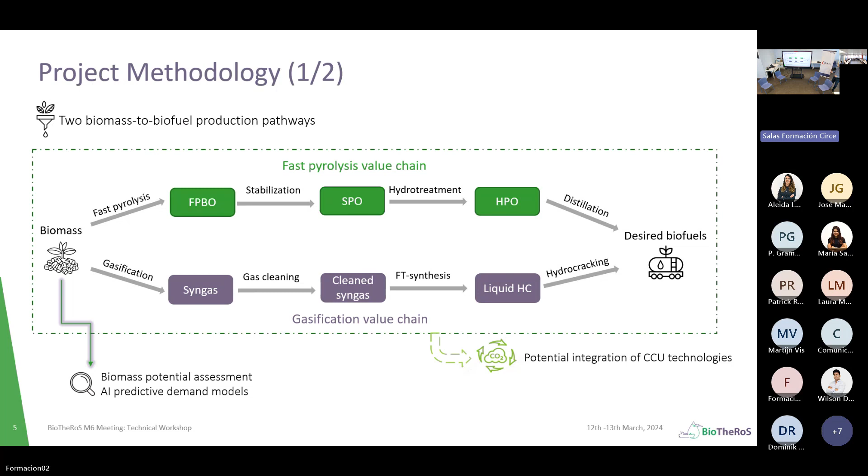The second step is the lab scale, with units at BESS and PTG for gasification and pyrolysis. Then the pilot scale, moving from lab scale to pilot scale at TRL5 in order to validate the technologies, resulting in a number of final products as shown on the right. Stakeholder engagement is also required, and it's something we would like to emphasize during our project.

Here are the expected results. First, environmental: we expect our solutions to reach an 80% greenhouse gas emissions reduction compared to the fossil fuel-based value chain. We also expect savings of energy of about 15 to 25%, while aiming to replace 25% of the current feedstock used for biofuels in aviation, not currently used for advanced biofuel production.

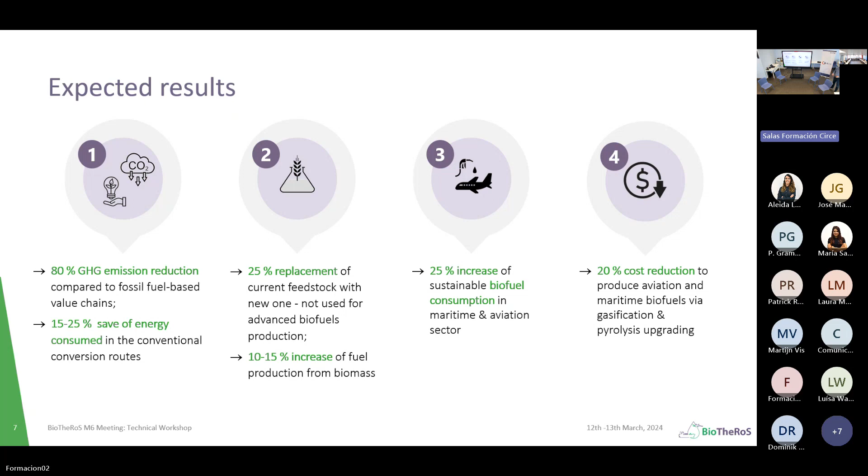As we mentioned, the target of the workshop is to engage with stakeholders, to identify barriers and challenges for our technologies, and to see your interest in the technologies and what real value chains are expected in the future. This will help us build our concepts and make our scenarios realistic. So first, see the barriers, understand the market, and engage the stakeholders in this effort.

Of course, in this effort that we do through the workshops, we also need feedback from other European projects. So we are open to discuss with other European projects and find synergies.

Finally, I have two slides for the groups that we target through this workshop and the next workshops we will organize in the BioTheRoS project.

First of all, biomass providers. Here we need some feedback, and I think during the topic the moderators can discuss more about that.

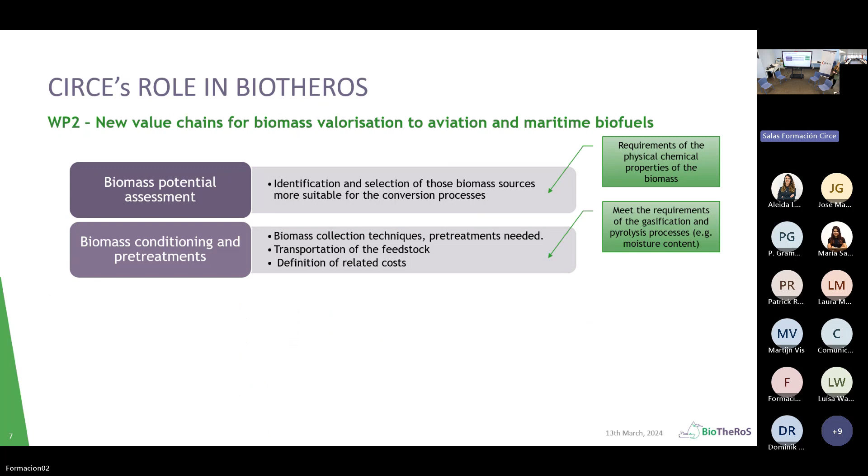That is something that is not trivial, and somehow it is also one of the main outputs of our participation in BioTheRoS. We have two parts of this. One part is already being performed by my colleagues Sebastian and Daniel in terms of understanding the biomass potential and what we need to do to prepare those feedstocks for their further use. That has been done mainly with our previous expertise and know-how in the processes, but with public information, public reports, and previous experiences in other projects.

But this is also key to have your feedback as industrial stakeholders, feedback from the association, and feedback from final consumers, to understand how we could upgrade this information to make it more accurate, so we could have a better prediction of what is going to happen and how the new value chains are going to be shaped.

That is going to be translated into two main confidential outcomes that cannot be fully released at the end of the project, but that would be the whole cost design of the new value chains and the predictive biomass models. For that, it is key to have information from the processes in terms of efficiency, yields, upgrading that we need to do afterwards, and from the policy framework, how these markets are going to be promising in the following years, even though the targets are huge.

So it's not going to be that easy to convert everything into a fully decarbonized maritime and aviation sector. So it is very important to have this type of initiative, because at the end, it is the opportunity to interact with each other and to have the perspective from different sectors that are not included in the project itself.

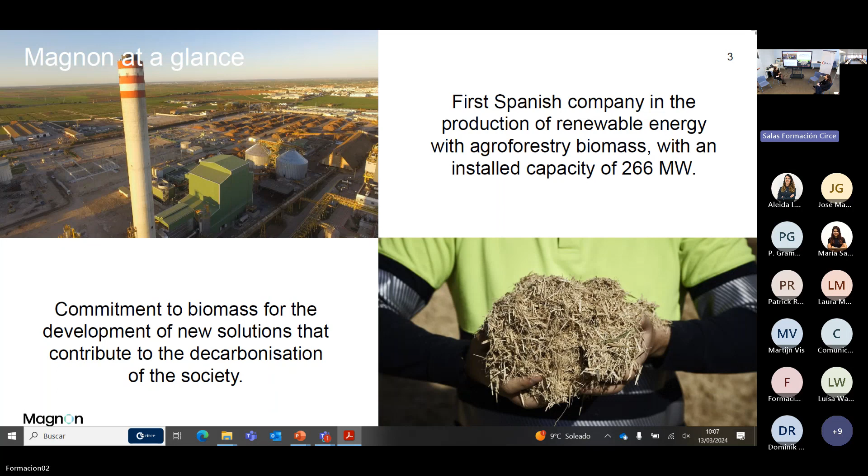Let's think here, I don't want you to put the red cards. I will try to manage my time as fast as possible.

Magnon, in the beginning - I say 'they' because I've only been with Magnon for a year and a half - started in the south of Spain with 8 different electricity production factories using biomass. We use, as you said, between 1.6 and 2 million tons of biomass for our factories. So we can consider ourselves specialists in biomass for our power plants.

But two years ago, we started to think that we had to change our business a little bit, not only for power plants and power production, but also to use this know-how of biomass supply that we have for our power plants to sell to third parties, or to participate in projects using biomass for other uses, not only for energy.

So nowadays, as you can see, in the south of Spain we have the power plants, but we also now have different capacity to supply biomass in the north and east of Spain. What you can see in Galicia, in the northwest of Spain, are the biofactories of ENCE, which also have some power production with biomass. So this is Magnon, and this is Magnon with ENCE.

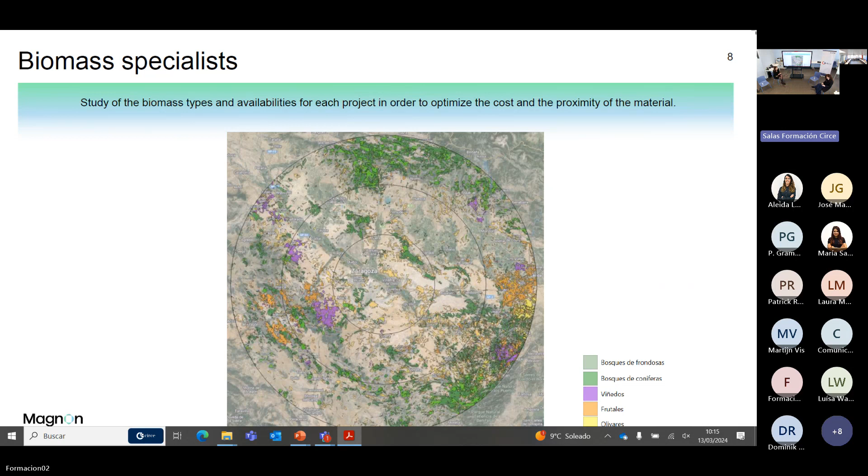So we make this analysis, we establish how to build the supply chain, how many people we need, how much material we need, how we can handle this biomass. We also need depots, warehouses for the biomass, because fruit has a lot of seasonality — we only have the fruit biomass from January to June, so we have to stock it somewhere. We have to design this kind of supply chain for our customers and for ourselves.

And that's just to finish — this is more or less a summary of what I've already said. So as we said, we consider ourselves specialized in biomass. Importantly, we have an internal decalogue for the sustainability of our biomass. All the biomass we use follows this, but mainly we say that we are not going to use biomass that could be used for other, smarter uses.

Okay, so at the end, we only use residues, and the word residues is always quite uncomfortable for us. We use the last use of the biomass for the production of energy. From here, we help in general the rural areas. We finance machinery because there is a lack of machinery here in Spain to obtain the biomass. And we make this kind of analysis, and of course, all the time we're trying to look for new biomass, for new types of biomass in Spain, and we have our team of machines. So this is more or less what I wanted to explain.

If you want to discuss about biomass, it would be great for me, on any of the areas that you have. Okay, thanks. Thank you, Esteban.

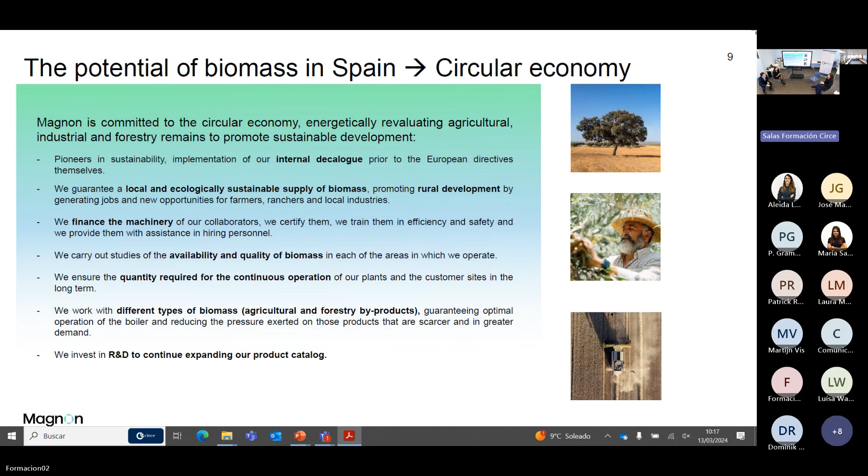Really nice to meet you. I really appreciate that. And it is very interesting because you already mentioned some points that are going to be addressed in questions about the sustainability of the feedstock. Yeah, how you manage to somehow combine this?

So very interesting. I think the next one was Teresa from Environmental - let's say the translation would be. She is an agricultural engineer, specialized in the food industry, and has...

Sorry, I was just following my PPT. Okay, as you wish, I mean, I guess there is no... Oh, no, there is no problem. But you can say it, I mean...

Laura, are you there? Yes. So do you want me to share my screen, or are you going with the other presenter?

Please just give me a second so I can provide a short introduction of herself. Laura holds a PhD in Chemical, Environmental, and Biofood Engineering from the University of Oviedo. She has experience as a researcher at the university, focusing on environmental technologies, but also in the industrial field, specifically in the steel sector. So she could provide us a very wide perspective of what's been done in the different potential biomass consumer sectors. Since the end of 2022, she's been part of the R&D department of Cogersa, where she's now working, and is mainly linked to different types of European projects. So now, Laura, the floor is yours.

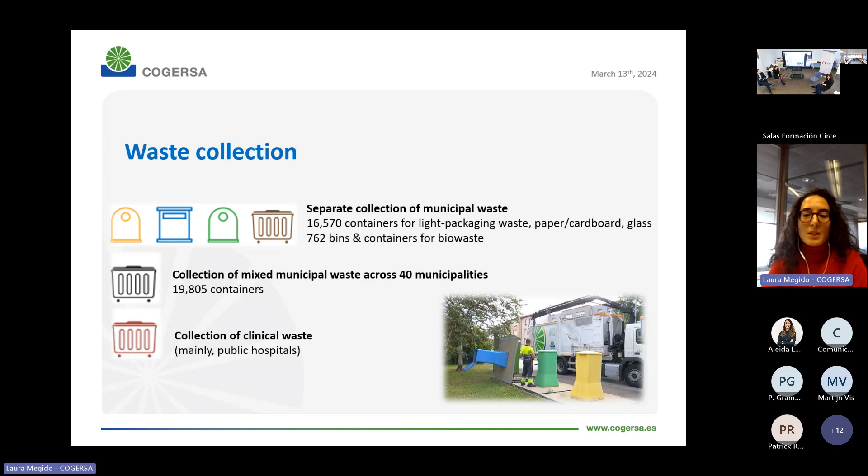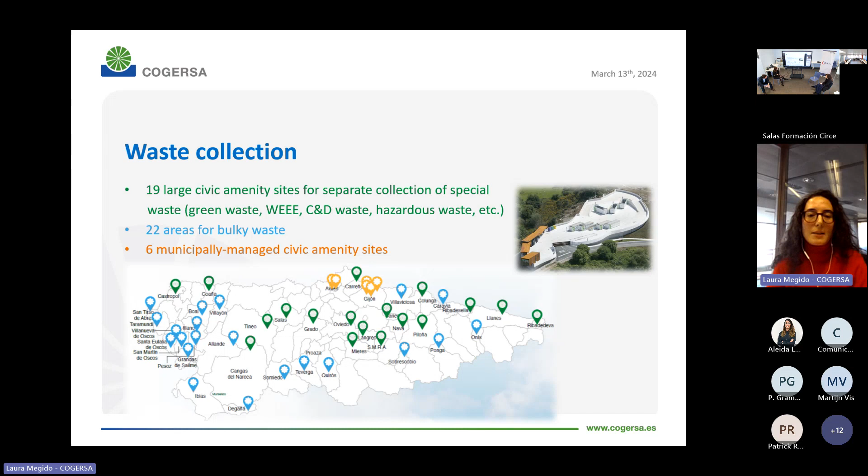Here's some numbers. In 2022, Cogersa managed around 821,000 tons of waste, of which half of it was municipal waste. Other larger fractions were also construction and demolition waste, industrial waste, and sewage sludge. Of these tons of waste managed, around 43% was recovered.

Cogersa sells some products such as recycled aggregates with the CE marking or compost obtained from green waste or from sludge. Also, we produce electricity using biogas engines.

So where is all this collected waste treated, and those materials and energy recovered? Well, that happens at the Waste Treatment Center, which is quite a unique complex that integrates many facilities.

For example, an MBT plant for mixed waste, sorting plants for light packaging waste and paper and cardboard, an anaerobic digestion plant for biowaste treatment, 3 composting areas for treating green waste, sewage sludge, and digestate, etc. There are also complementary processes, such as 2 wastewater treatment plants, a laboratory, and an open lab for R&D projects.

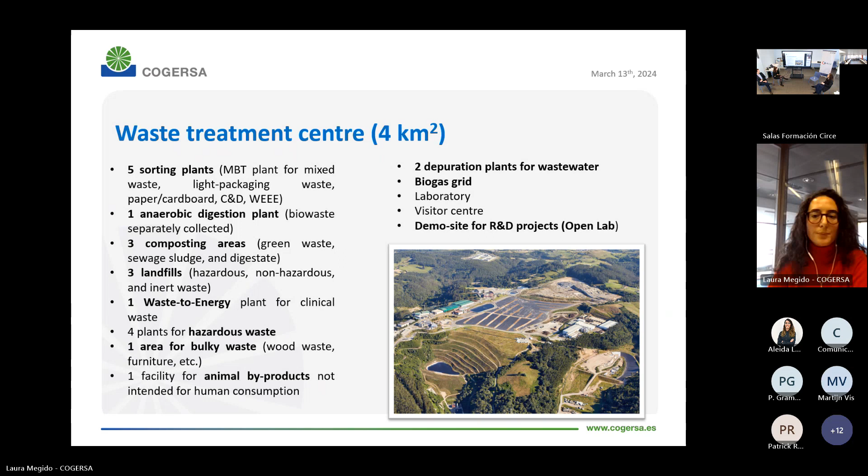To give you details of some of these facilities, here, for example, you can see our new MBT plant. It was built last year and recently started its operation to treat up to 415,000 tons of mixed municipal waste, mostly.

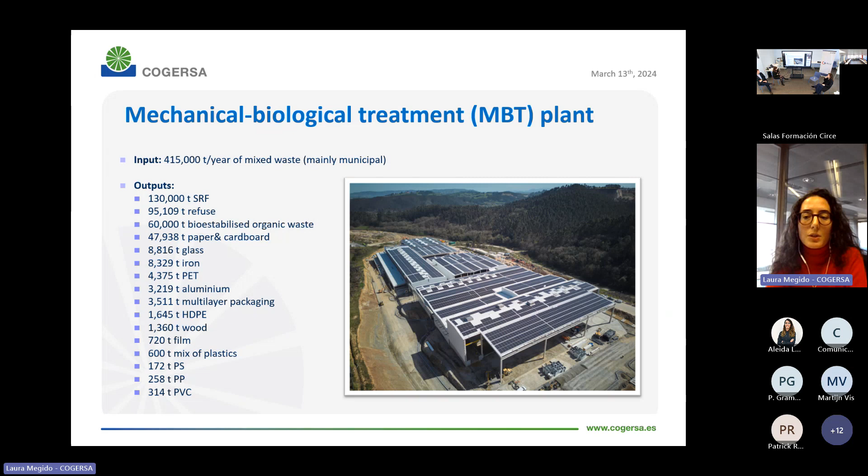You can see here also the expected outputs of diverse sorted materials. Some of these materials have low uptake or poor acceptance for mechanical recycling, depending on their characteristics. So Cogersa will have to deal with great amounts of biostabilized organic waste, 60,000 tons, also SRF, dirty paper and cardboard, among other streams. This is and will be quite challenging for us.

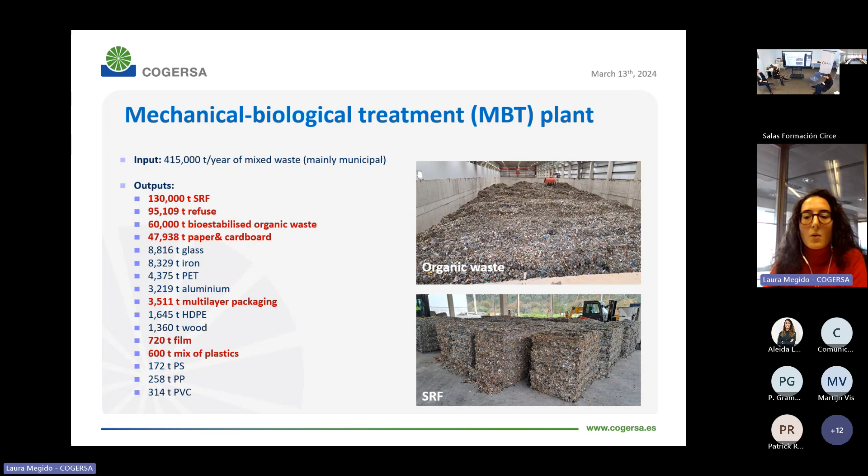Here are some photos and data about other facilities within the complex of Cogersa. Among other future challenges for us, that will be the compost obtained from sewage sludge, because next year it will lose its certification as compost. Then it will no longer be considered as compost; it will be treated sludge. Cogersa managed 80,000 tons of sludge in 2022, of which 60,000 tons were treated in the composting plant to obtain compost. We also have an area for wood and bulky waste, another area for composting green waste and cattle manure, and we produce compost with eco-label.

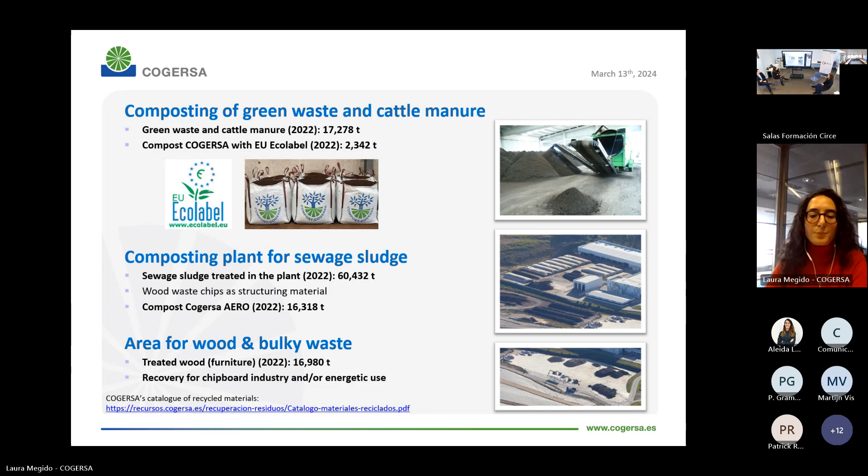So what are the alternatives for treatment? Of course, first of all comes waste prevention and reuse. But after that, we have to think in recycling, as it is the preferable option in the waste hierarchy. In the case of mechanical recycling, some waste streams have low acceptance, and that's when chemical recycling may enter. But these are still new technologies that will have to give proof of their reliability. And then after recycling comes for sure recovery as recovery alternatives, where waste to energy and waste to SRF have its opportunity.

In this graph, we can see the treatment carried out in the European Union in 2021. 9 countries have already met by that time the target of less than 10% of landfilling, using recycling plus composting and also waste to energy alternatives.

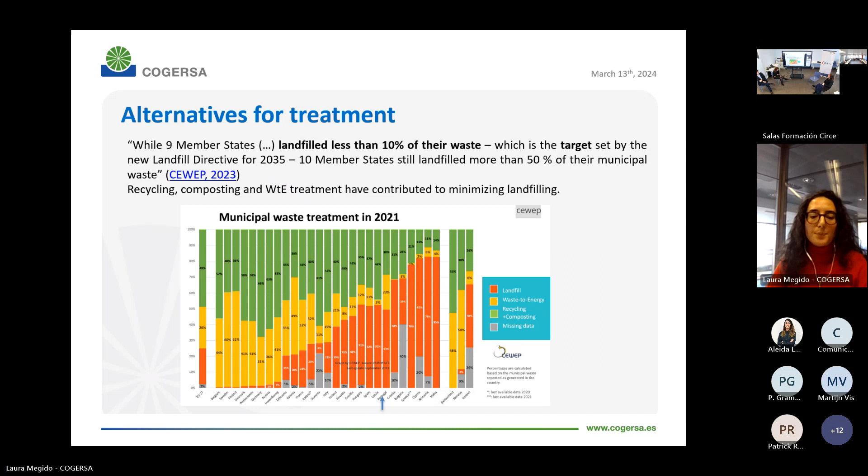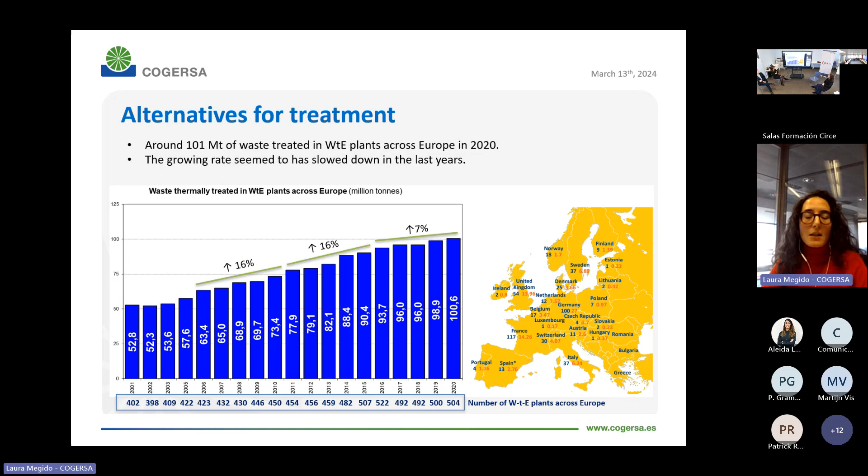So taking into account all of this, Cogersa, as a waste manager, is interested in collaborating in R&D projects, and it's developing an open lab to act as demo site of new technologies. I'm not going to explain all of the past projects and the projects going on, just mention that Cogersa was involved in the past in 2 projects focused on co-incineration. One was to study novel routes for sewage sludge recovery, and the other one to obtain SRF from municipal waste to be used as an alternative fuel.

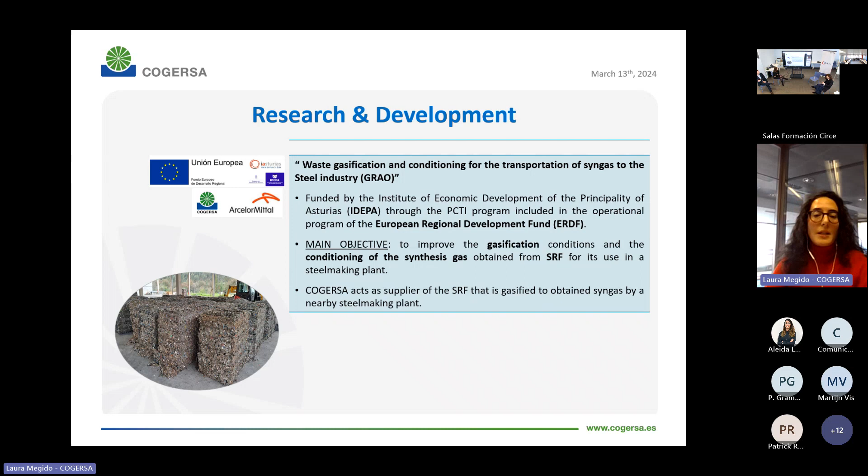Nowadays, we are collaborating with a well-known steel company to assess the gasification process of our SRF and obtain synthesis gas. And also, in the framework of a Horizon project, we will host a hydrothermal liquefaction pilot plant. In this case, the HTL reactor will treat plastic waste, but we are also interested in the future to assess this technology for sewage sludge, SRF, and other streams.

Laura, sorry to interrupt. 2 minutes left, okay?

Okay, thanks. That could be the case of SAF, given that some research shows that these technologies, HTL and gasification, could be used to obtain SAF from wet organic and municipal solid wastes.

So just to finish, here are summarized some future challenges. First, as I said before, of course, always comes waste prevention and reuse, but then waste managers will select the treatment alternatives to reduce landfilling. And in doing so, technical and economic feasibility are really important and relevant. But also, we think that social acceptance is key for these emergent technologies.

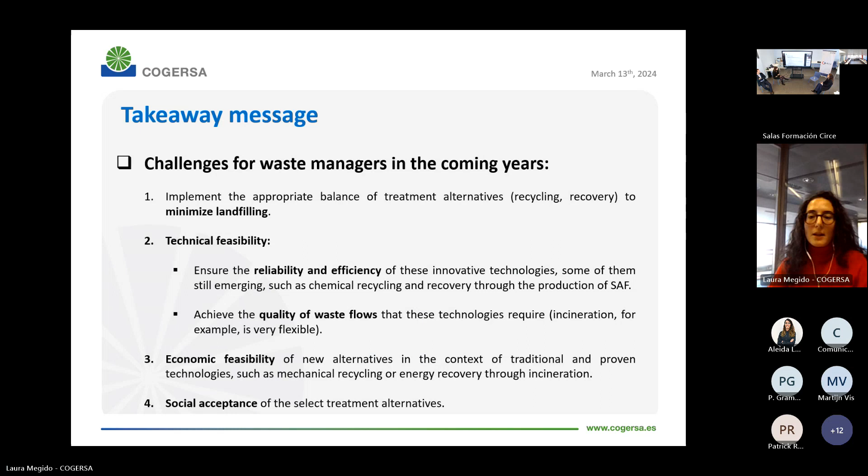Thank you all for your attention.

Thank you so much for the introduction. I didn't want to jump in the middle, because I saw you were running very smoothly. So thanks so much for providing a different perspective, the potential of other types of feedstock that could have a future in this biofuel market.

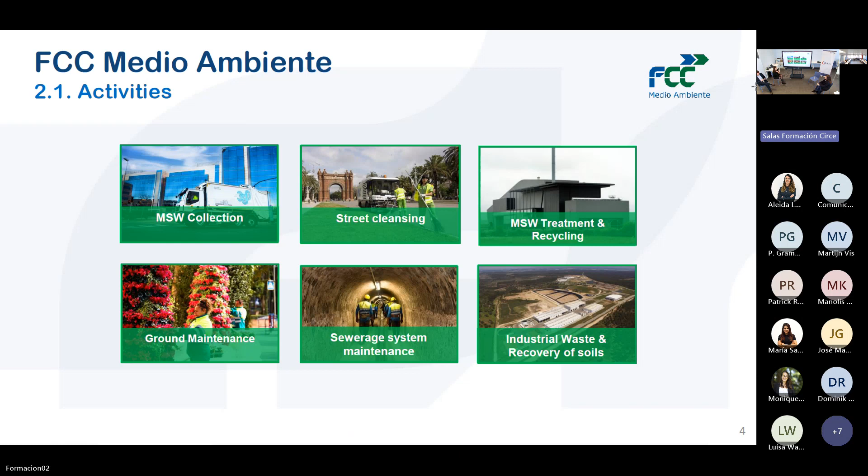I'm part of the collection. Regarding Laura's presentation, we are the private company that operates the waste treatment plants. We are focused on the same raw materials, but the public administration and we are the private companies.

So this is the main numbers. We are a very old company, since 1911. We are among the more important companies in the world regarding environmental service. We serve 6 million citizens, and we have a lot of employees, so you can see all of these things.

I'm going to tell a little bit about the international presence. The headquarters is in Spain, Madrid, but we have presence in Europe, UK, and USA. So we have 4 different groups.

One is from Europe, from East, another from UK, another is from USA. USA is a new market, but with big growth in the last years, and another is UK. Regarding Spain, we are in Spain and Portugal, and we are the same company.

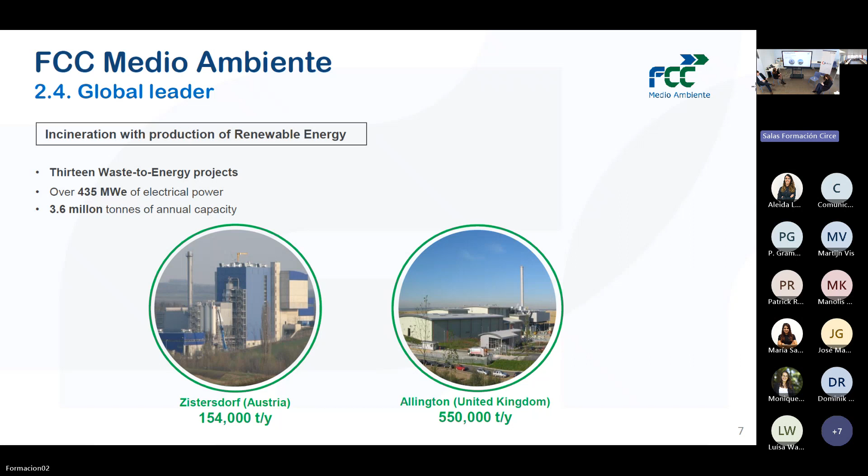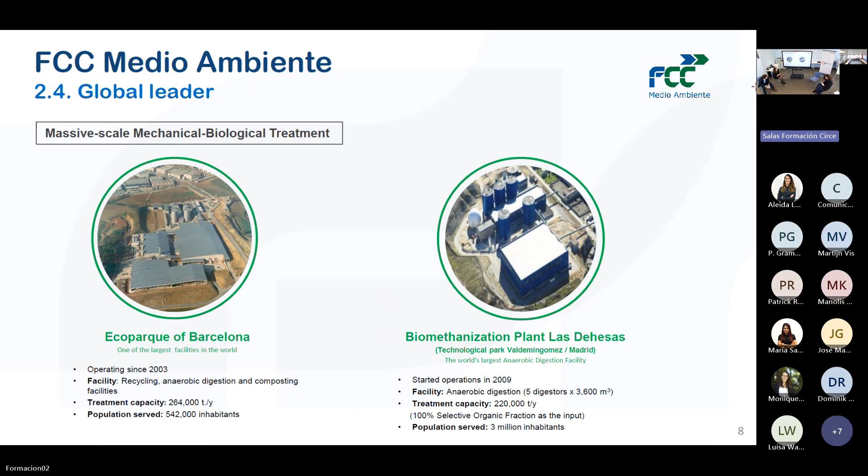As I will say, the owner of these plants is the public administration, but we operate this kind of plants. So we are the company that operates the plants and introduces the new technologies. Regarding this, we are in Barcelona and the biomethanation plant in Las Dehesas.

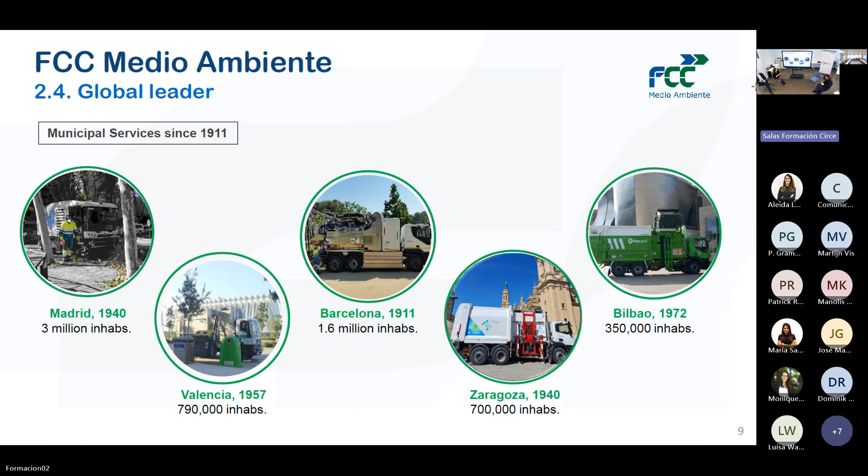This is some service that we work in Madrid, Valencia, Barcelona, Zaragoza, regarding the collections. We are in the more important cities of Spain, and this is my part.

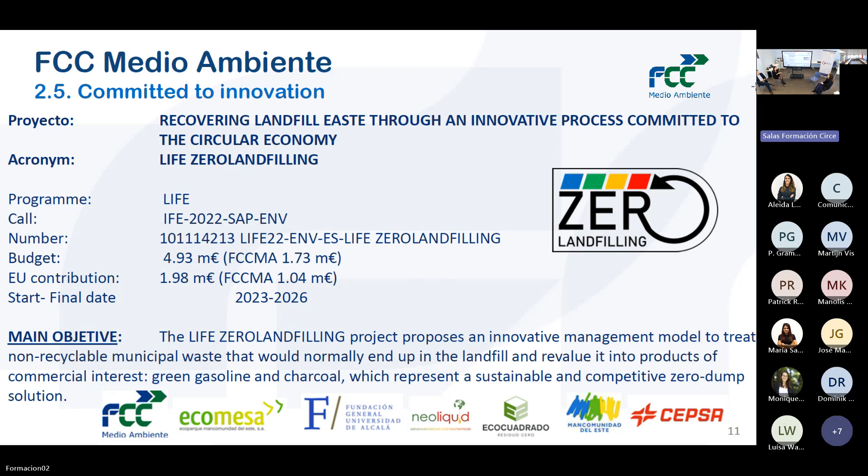Here you can see the concept of the project. We started last October, and we will start to operate next November, December. But it's a little different than this other project: here we hope to obtain some bioproducts, and now we are focusing on syngas or biofuels.

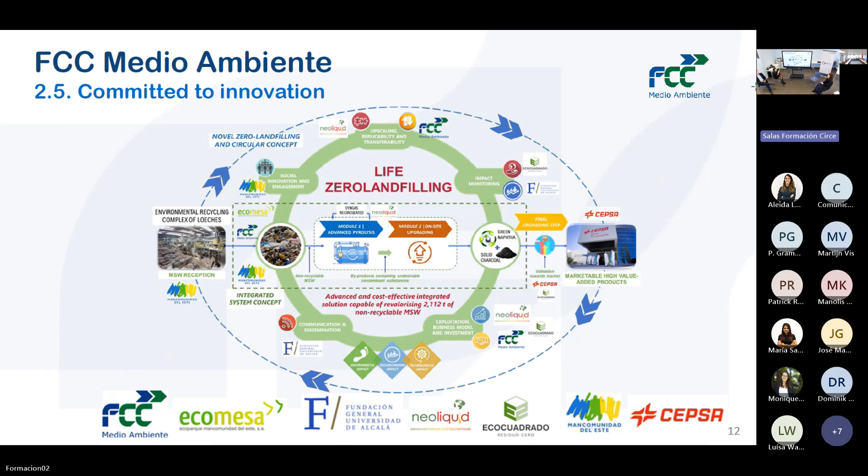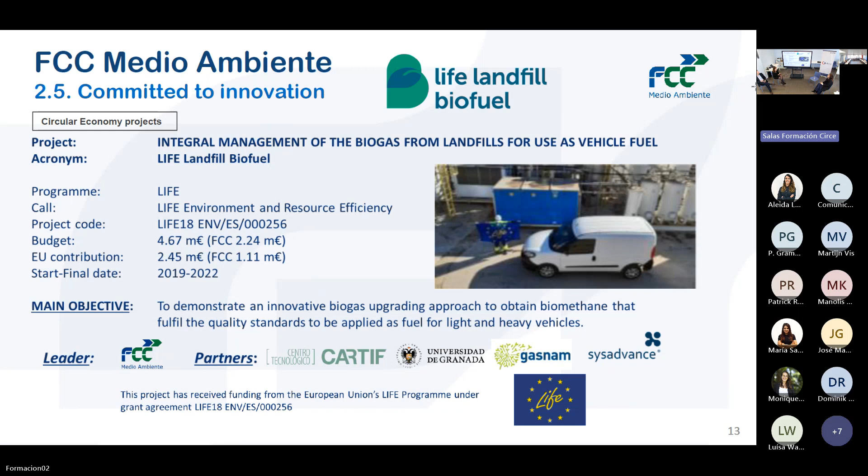So now we are demonstrating how we can use this kind of biomethane in our trucks and vehicles. The other one that we have here is Eclosion.

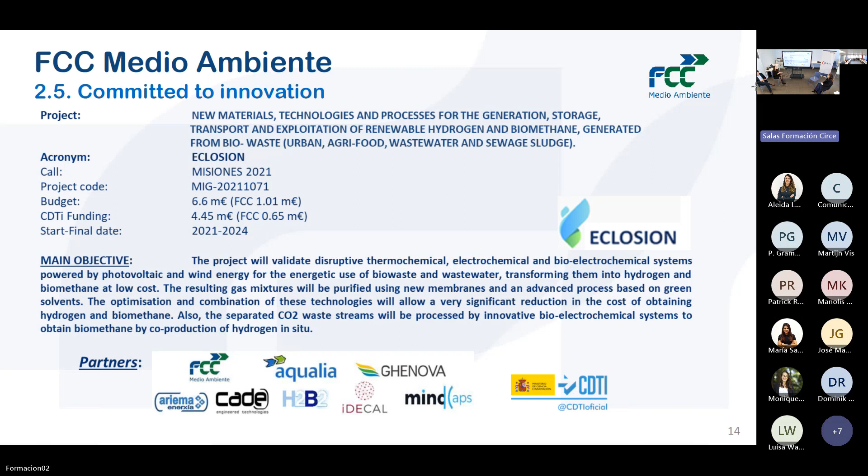Eclosion is from national funding, and here it's more from the lab. We are focused on biohydrogen and biogas, using new technologies like dark fermentation and gasification, critical gasification. It's very much in the lab; we are not going to demonstrate for any purpose yet.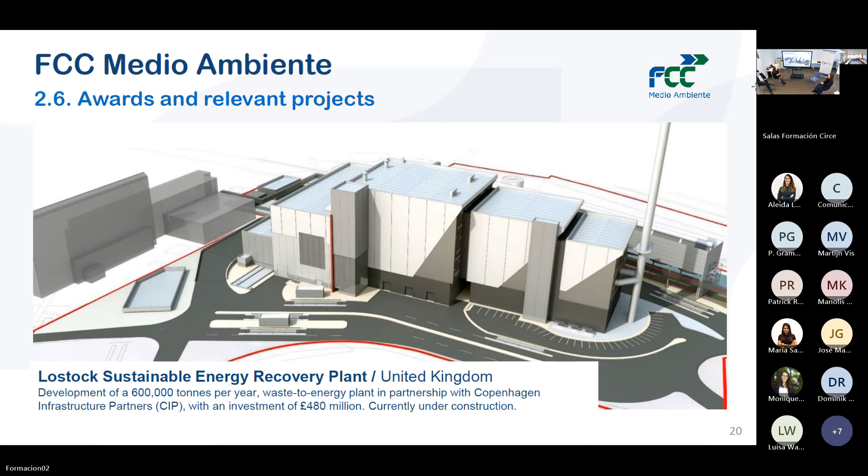Thank you. It was 2 minutes now, so great. Good job, thanks so much.

I would say from all the projects you have presented, it is great, firstly, and also from what Laura already said, to feel that the waste management sector is so aware of the different options you have to further valorize your wastes and create new value chains. So even though the projects were not exactly the same topic as BioTheRoS, you are also familiar with the technologies. So in that sense, I believe you could also provide some vision on the barriers and opportunities.

Yes, so I focused this presentation more on our technologies, on the talent that we have. Our talent is to reduce the amount of waste that we dispose of in landfill, and on the new technology that we need to address this challenge that we have at this moment.

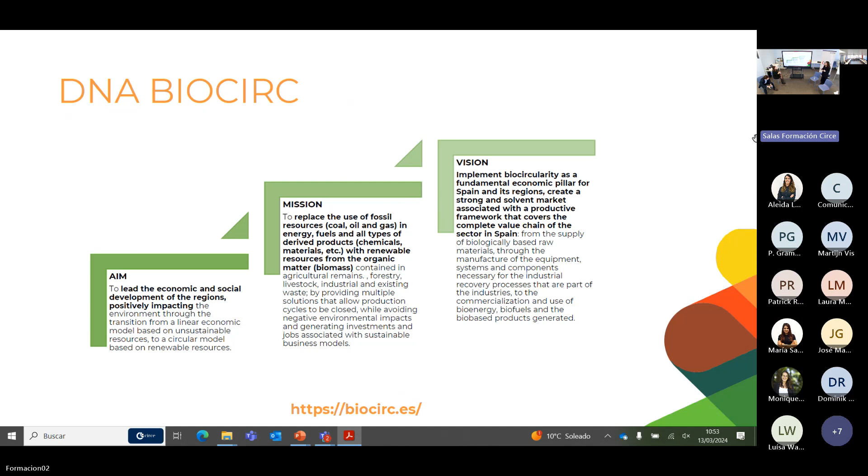Sorry? I couldn't agree more with what you're presenting. Sometimes bioeconomy value chains are not valued as much as they could be. I don't know how it is in other countries in Europe, but definitely in Spain there's so much work to do here. Dimitri just told me that some colleagues need...

Andrea has said yes, we will have like 20 minutes of roundtable. Yes, 15 to 20 minutes, just also for others. Okay, time. Yeah, yes, great.

Thanks so much to all of you for your presentations and perspectives. I have a first question to the four of you. I believe it's very linked with what you already mentioned, Margarita, about how markets could evolve in the future years. What is your feeling about whether supply and demand are going to be enough in the following years for all the applications mentioned, not only SAF but also biorefineries, pharma industry, alternative materials, feedstock, biofuels, etc.? All the sectors interested in this type of resource, is it going to be a fight in the following years in the market, or even now? So what is your feeling about this?

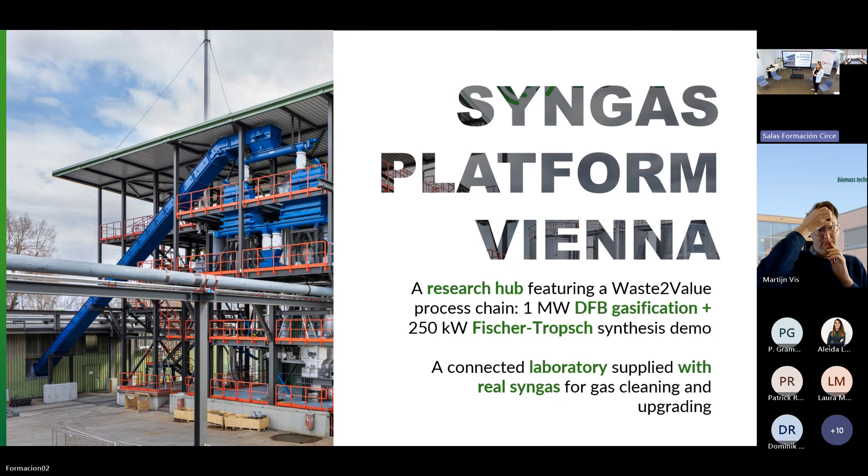My name is Andrea Sonnleitner. I'm from BEST in Austria, and I'm presenting today the gasification technology we are using in the BioTheRoS project. This is the syngas platform in Vienna - a research hub with a waste-to-value process chain, a 1 megawatt gasification plant, and also a Fischer-Tropsch pilot plant. I'll give you a brief history: in 2019, the research group moved from Güssing in Austria to Vienna to build this new research hub.

We had a commissioning phase over 2 years, and since 2023 we are in the research and development phase, operating this lab pilot and demonstration scale infrastructure.

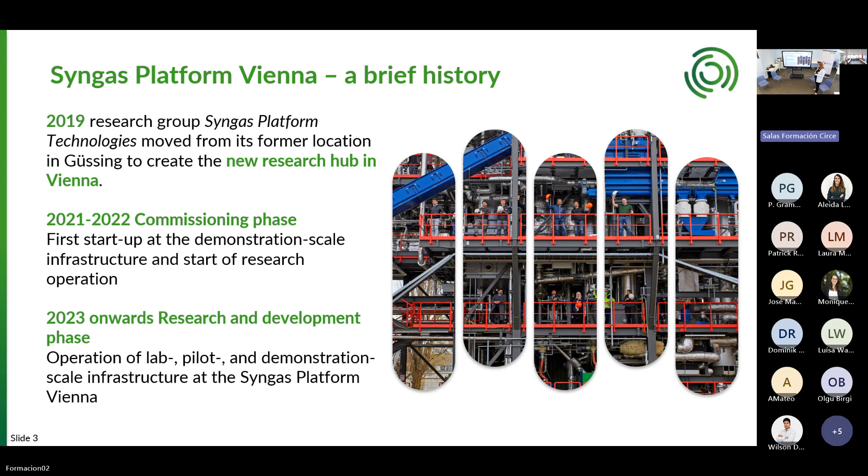Here you can see the site of our location. We are located at the industrial site of Wien Energie, which is also a very important partner. There we have this dual fluidized bed gasification demonstration plant, the Fischer-Tropsch pilot plant, and dedicated feedstock containers. We have laboratories and analytics at the site, including temperature swing adsorption, aqueous phase reforming, and a smaller lab-scale Fischer-Tropsch plant.

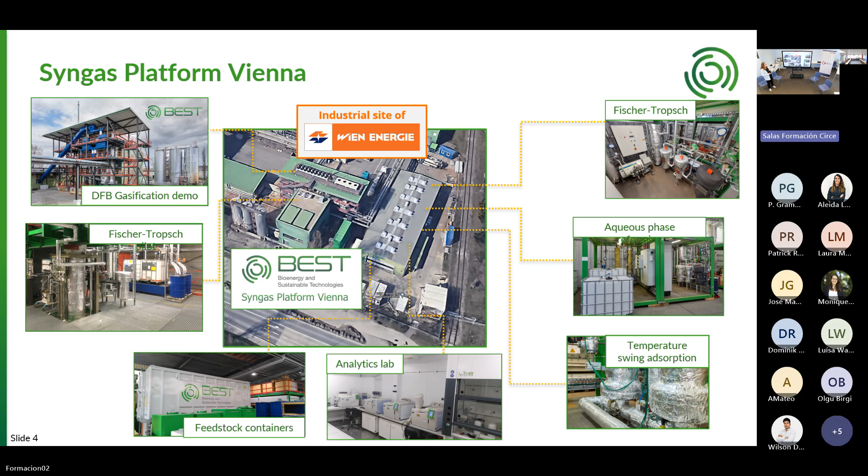Here's the process overview of the technology. We are considering residues as feedstock using this advanced dual fluidized bed gasifier. Input residues come from forestry, agriculture, industry, or wastewater treatment. There's gasification, and the product gas is then cleaned on site - coarse gas cleaning, fine gas cleaning - to obtain the hydrogen-rich synthesis gas. Then via downstream synthesis, sustainable biorefinery products can be obtained, for example SNG, hydrogen, different transportation fuels, and chemicals. There's also the option for sector coupling with external hydrogen sources.

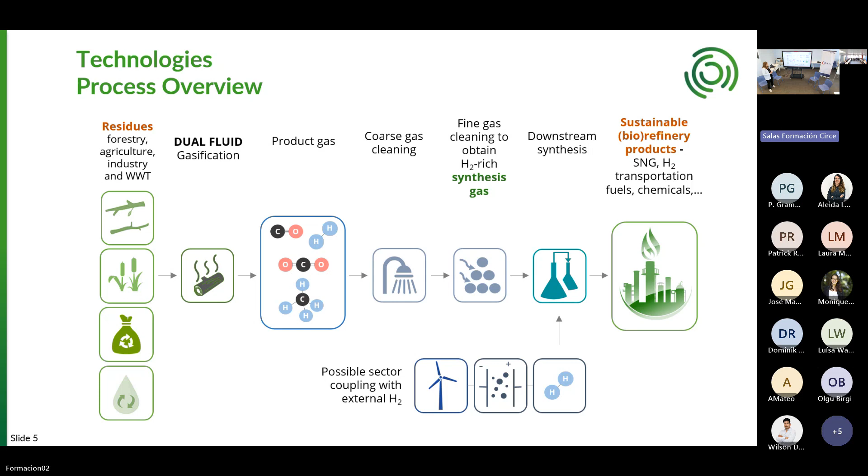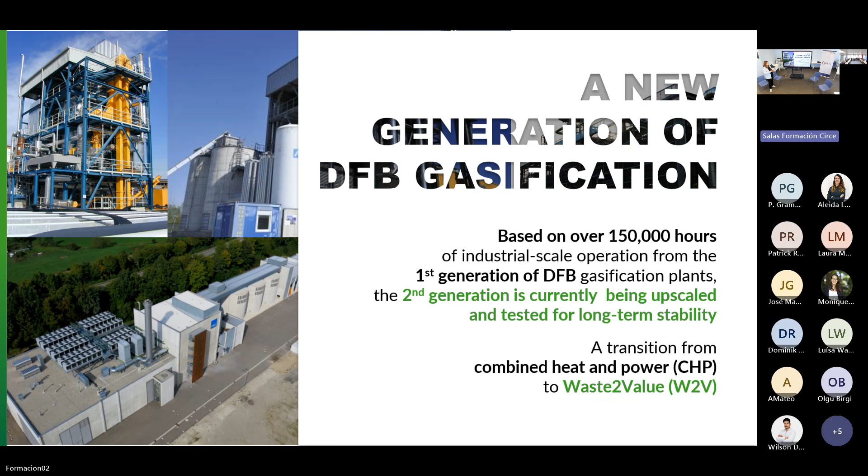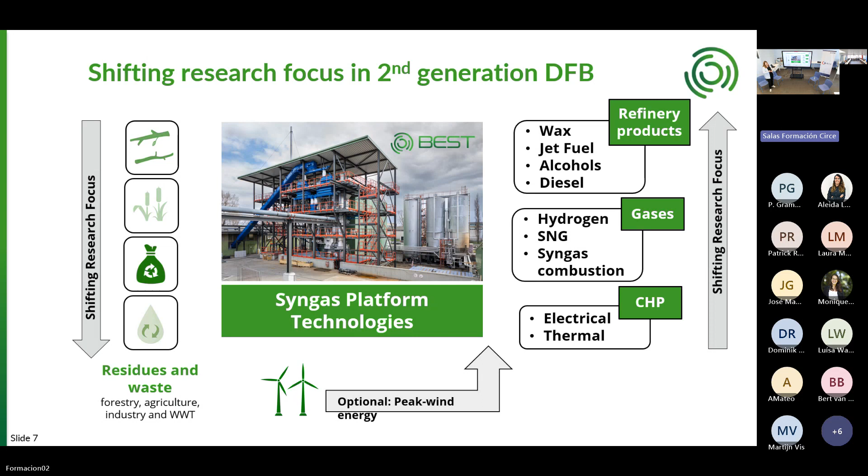So what is the innovation of our dual fluidized bed gasification? There has been a lot of work on first generation DFB plants, and this one is a second generation - we're trying to move the focus from combined heat and power to waste-to-value. The input streams are residues and wastes from different sectors, gasified at the syngas platform, and the research focus is shifting from CHP to higher value refinery products like waxes, jet fuel, sustainable aviation fuels, alcohols, and diesel.

Now some details on the experimental equipment of our facility. There is the dual fluidized bed gasification with this 1 megawatt demonstration scale plant, built for long-term campaigns over multiple weeks of continuous operation. Here you can see the gasification column with a counter-current flow column, and here the combustion column. This reactor design has been upscaled from a 100 kilowatt plant from the Technical University of Vienna.

Now to the Fischer-Tropsch pilot plant. This is a slurry bubble column reactor with 250 kilowatts, meant for operation in long-term campaigns over several weeks in continuous operation. The gas cleaning includes hot filtration, quench, solvent scrubbers, and activated filters. The Fischer-Tropsch part of the syngas platform Vienna has been developed in cooperation with KIT, the Karlsruhe Institute of Technology.

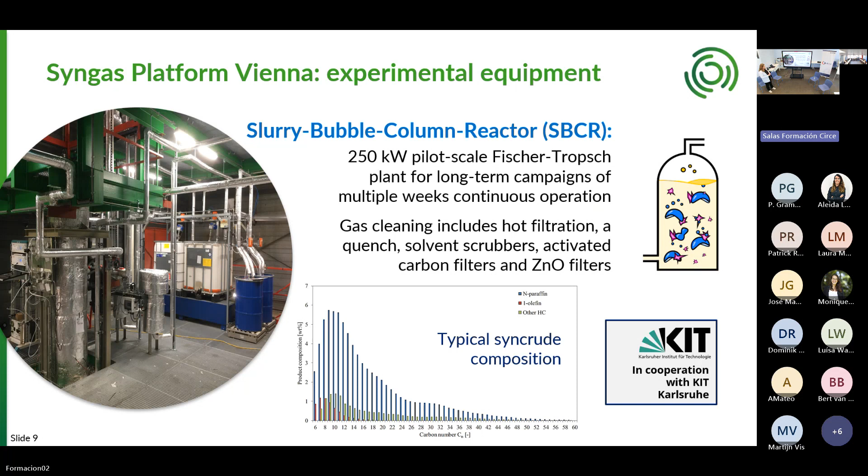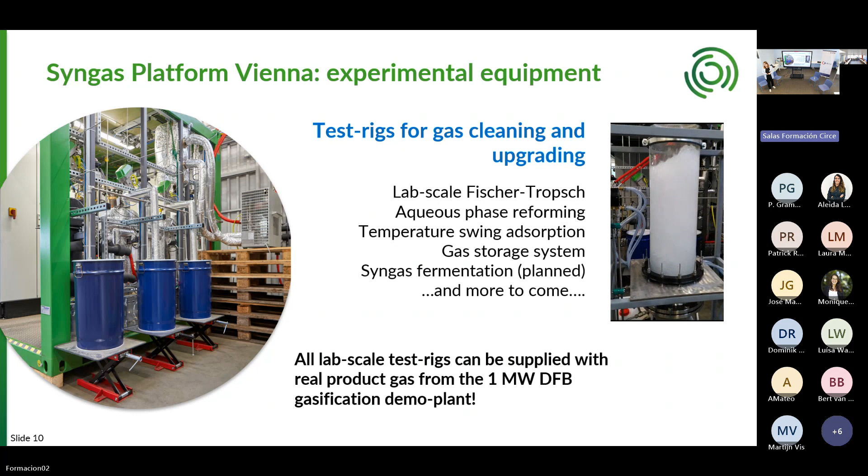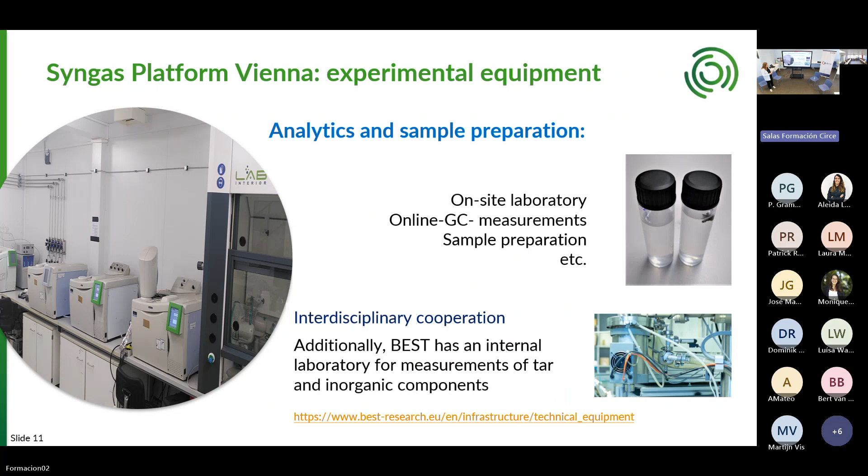Then we have some test rigs for gas cleaning and upgrading. Here you can see a model of the Fischer-Tropsch bubble column reactor. We have different aqueous phase reforming, temperature swing adsorption, and it's also planned to install a syngas fermentation at our facility. All these lab scale test rigs are supplied with real product gas from the 1 megawatt gasification demonstration plant. And of course, we have analytics and sample preparation and all the measurements necessary for assessing the process on site.

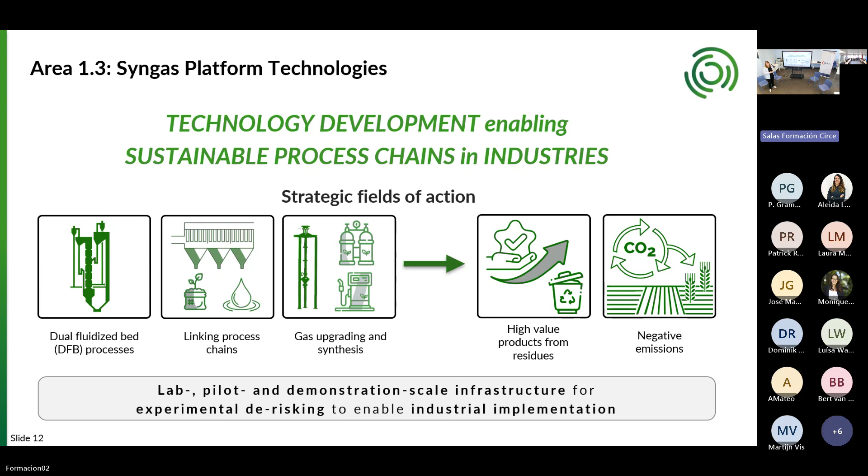So to sum up, what do we want to do? With this syngas platform in Vienna, we want to enable sustainable process chains in industry. We want to use this dual fluidized bed gasification process with residues and wastes, and synthesize the produced gas to higher value products from these residues. So we have this lab, pilot, and demonstration scale infrastructure for experiments and also for de-risking, to enable the industrial implementation of this technology.

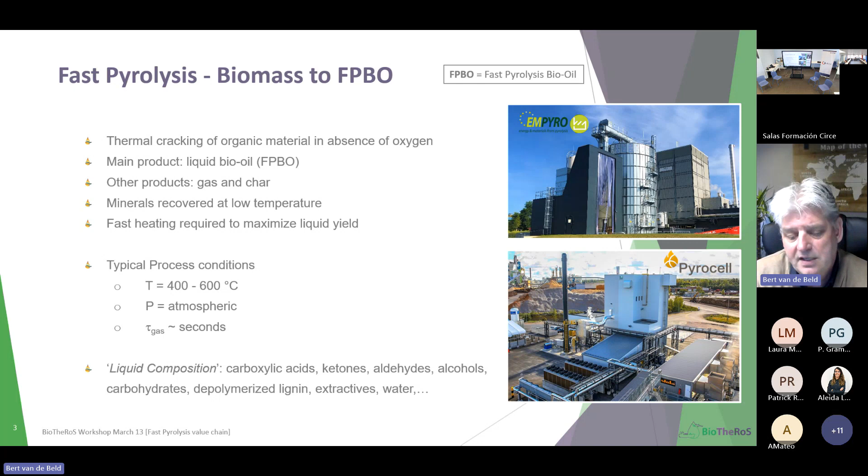Just a few more words on the process itself. We start with biomass. We have the fast pyrolysis reactor, and in the reactor we mix the biomass with hot sand. Normally we run with hot sand.

We get this depolymerization of the biomass. You get an organic vapor. We try to condense it as fast as possible, and the condensate effect is the pyrolysis oil. Not everything can be condensed, so there will be some non-condensable gases, typically CO, CO2, and a little bit of methane.

That's also burned within the process. The sand and char are removed from the reactor and sent to a char combustor. In the char combustion, as the word is saying, we are burning the char, reheating the sand, and the hot sand is sent back to the reactor. So typically the temperature in the char combustor is a little bit higher than in the reactor, and it's a full continuous process.

On the right-hand side, you see this table with the properties of pyrolysis oil, or typical properties of fast pyrolysis oil. You can also see it's very different from fossils.

Normally we have maybe some 20-25% water in the liquid. The density is very high compared to fossils. The heating value is much lower. It's acidic, and the typical acid number is around 70.

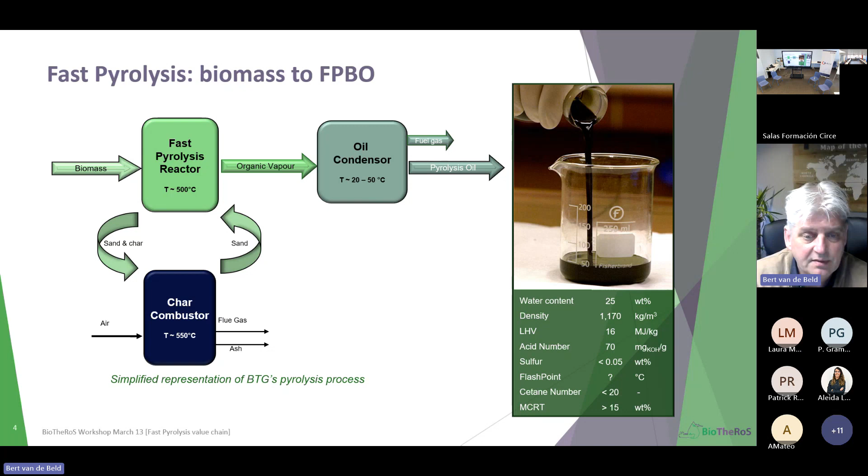If we start with fast pyrolysis oil, it means we need an upgrading process. That's something we also developed at BTG. What you see here is the upgrading process, or schematic drawing of the upgrading process.

We start with pyrolysis oil, and then we have a first catalytic hydrotreater. It's called stabilization. We run under hydrogen, under high pressure, with a dedicated catalyst. That's the first step in this overall upgrading process. The product from this part we call stabilized pyrolysis oil, SPO, and it's mainly changing the oxygen functionality in the oil, making further treatment easier.

From SPO, we go to a second hydrotreater, mainly for deoxygenation. In the stabilization, there is hardly any deoxygenation, so the oxygen content is still maybe around 30% or so. In the hydrotreater, normally a typical NiMo, CoMo catalyst, just commercial catalyst, we do further hydrotreatment and get still an intermediate, the SDPO.

It's stabilized, it's deoxygenated, still containing several percent of oxygen, and we do a final hydrotreatment ending in HPO. In HPO, the hydrotreated pyrolysis oil, the oxygen content is very low, even close to 0.

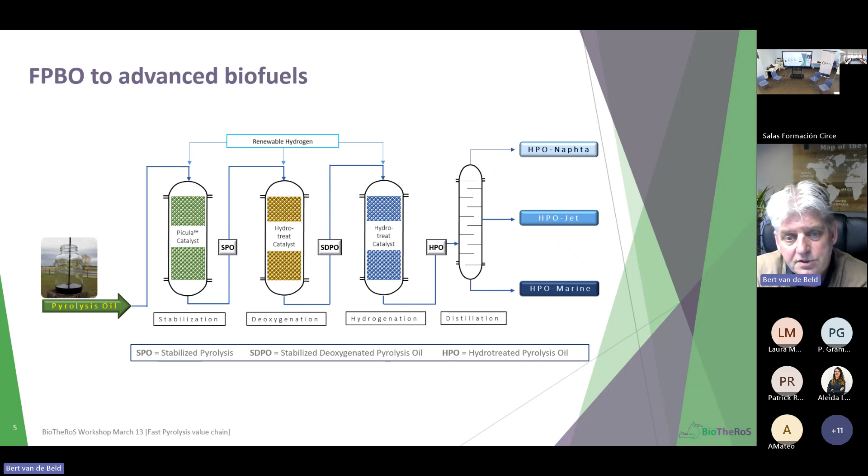Then we go to the hydrotreatment, the further treatment over a NiMo or CoMo catalyst. We get this HPO, the hydrotreated pyrolysis oil. This is well miscible with all fossil fuels. The properties are more similar to that. It does not contain water, it does not contain oxygen, and that's distilled. As shown here, we can do it in 3 fractions.

For instance, the naphtha typically has a boiling point below 140. It's mainly cycloalkanes, and we see a lot of ethyl, methyl, propyl cyclohexane. We get a second fraction, and in fact that's the major fraction.

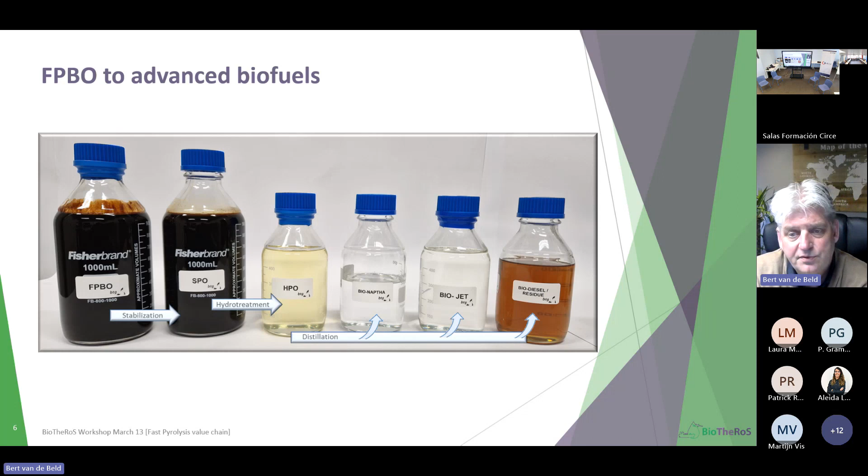The biojet is typically around 50% of the HPO boiling in the jet range, and we get a heavier fraction called the biodiesel, the residue. It's the HPO diesel, and this is also what we will do in BioTheRoS for two different types of biomass. We have facilities here at BTG where we can do fast pyrolysis.

And we have a pilot plant. The feed rate depends a bit on the feedstock, but it's around 100 to 200 kilograms an hour. We typically run it during the day, not fully continuous, but running for 4 to 10 hours a day, producing sufficient oil for further treatment.

Within BioTheRoS, we will use the bench scale unit. Then we take the pyrolysis oil from a specific biomass and go to either bench scale or pilot scale hydrotreating. Also in BioTheRoS, we will use the lab scale hydrotreaters. We have 5 of these available at BTG, typically around 1 kilogram a day, but running 24/7. We just started up and have been running for a couple of weeks.

We also have a pilot plant, normally operated during the week, not on weekends, handling 20 to 50 kilograms of feedstock a day. These units will also be used in BioTheRoS to demonstrate the whole value chain.

One other part is further scaling up, and just to show one picture of how we see it: the combination of fast pyrolysis and upgrading. In our opinion, fast pyrolysis is done on a decentralized basis, relatively small units of, let's say, 40,000 tons of biomass a year.

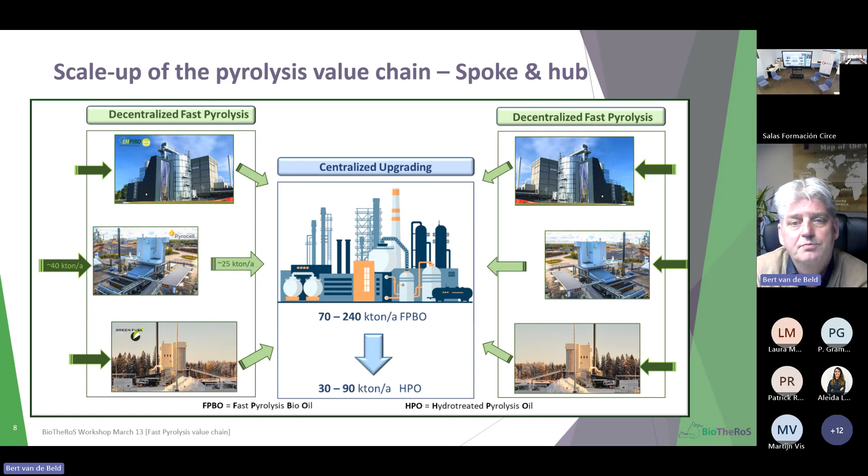And we have the centralized upgrading. We think about units of, let's say, 70 to 240,000 tons a year, producing 30 to 90 kilotons of HPO annually. So it's a combination of decentralized and centralized upgrading, and that brings me to the end of this presentation. So what we will do in the project: demonstrate the whole value chain from biomass via fast pyrolysis to advanced biofuels.

We will do it for 2 types of biomass. We aim for SAF and renewable marine fuel, and there will also be an evaluation of the scaling up of this value chain. That's the end.

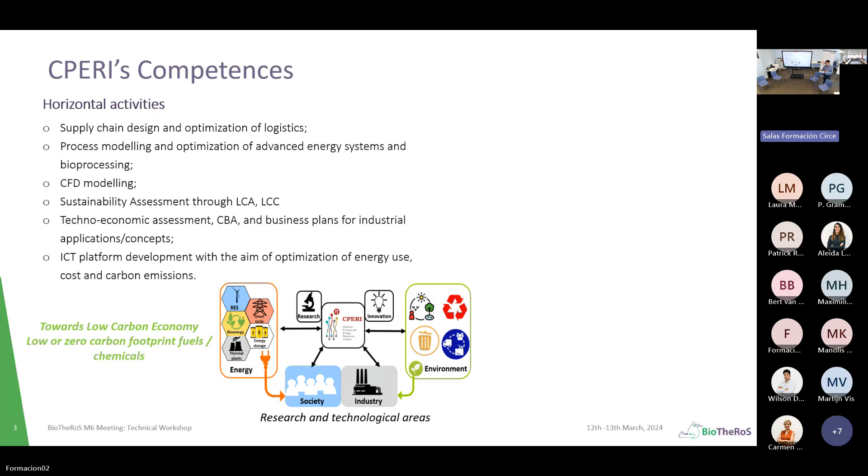I'm leading this group on the techno-economic assessment and business plan for industrial applications, and development of ICT platforms, especially focusing on optimization of energy use, cost, and carbon emissions.

Now some few words about our work in life cycle analysis in the project. The main scope is to develop an LCA framework in environmental, economic, and social terms based on the ISO.

Just a few words about LCA. LCA is an assessment starting from defining the goal, then having an inventory analysis of data in order to process them and reach a final environmental footprint. Impact assessment is the calculation methodology we use to estimate the environmental footprint, and finally interpretation, which involves discussion and sensitivity analysis required based on different parameters.

So in the framework of BioTheRoS, we will develop an LCA framework for scale-up projects. We need to define a quite realistic use cases to understand the boundaries and to evaluate the project.

In addition, we develop and are going to further develop a multi-criteria decision methodology. Based on life cycle thinking in environmental, economic, and social terms, we will merge all of these aspects and try to reach a single decision based on environmental, economic, and social terms.

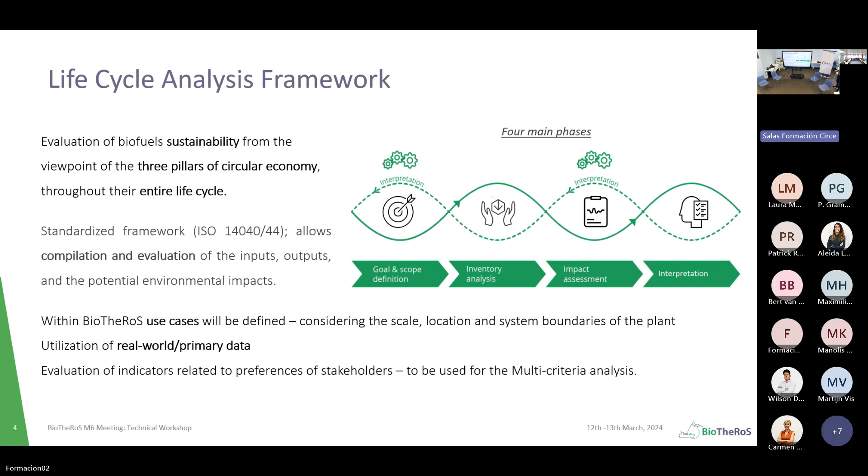Just a final last slide is about process modeling and computational fluid dynamics. Apart from LCA and social modeling, we will do process modeling and CFD, working especially on gasification for CFD.

We started on the lab scale gasifier, the one that Andrea mentioned in her presentation. Then we will make the CFD, calculate the kinetic rate, and we have two pathways: one to apply the selected network at industrial scale gasifier, and of course to provide all of these informations and parameters, crucial operation parameters, to the process modeling in order to make the upscale.

So our motivation, our goal, our objective here is to create a scalable process model for mass and energy balance calculations for scale-up projects, and to estimate those operational parameters for the operation of the scale-up project.

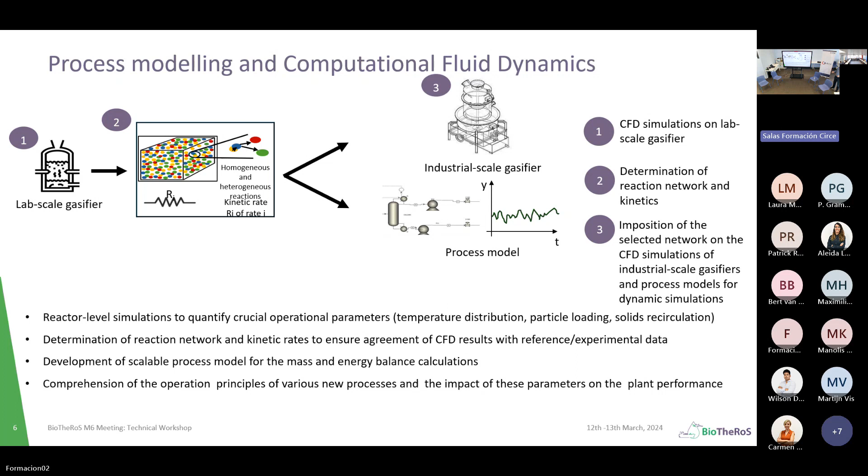As a summary, in BioTheRoS, as BTG and Best mentioned, we have some lab activities, and in order to go to the scale-up, we use that data through our models to reach the scale-up and to evaluate this based on life cycle thinking. Thank you for your attention, and I hope we were on time.

Well, thank you very much to Circe and all the partners for inviting Repsol and giving us the opportunity to explain our strategy for renewable fuels and materials. I would like to do it as fast as I can, since I don't have much time, like everyone. But first of all, Repsol is leading fuel supply in Spain with its refineries, and not only refineries—we also have petrochemical units, and we produce all kinds of chemicals, plastics, as well as lubricants and asphalts, and all that downstream value chain.

So the main industry is the refinery. Our aim is to transform our business model, to transform our industrial centers. Crude oil and natural gas are our normal inputs, and our aim is to substitute those inputs with waste, all kinds of waste, and with biomass. We also have green power, a renewable energy business, but also green power for the refineries, and we're producing hydrogen. So our aim is to do a whole transformation of our business.

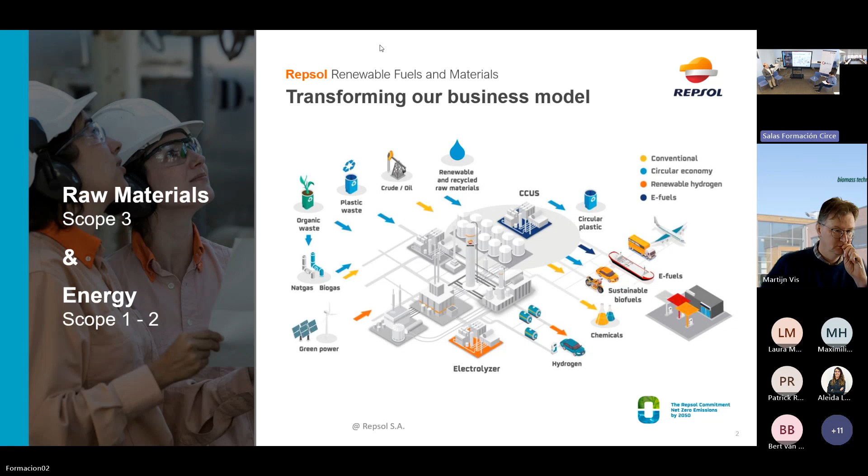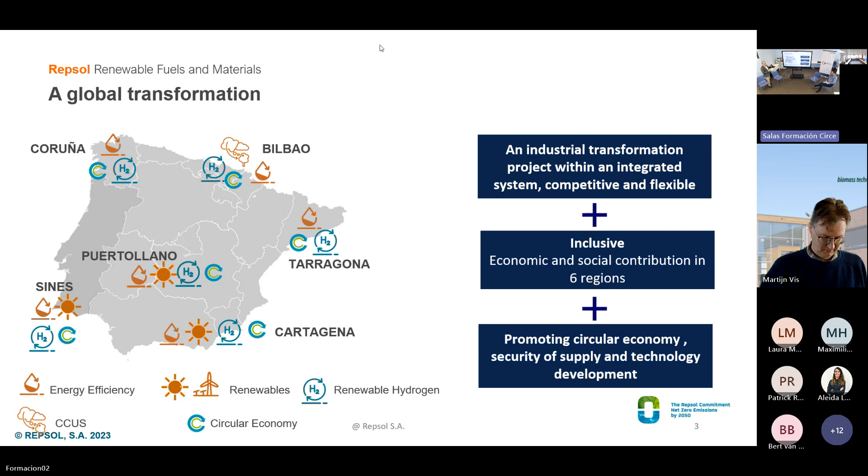So this is already in place, and we have to take advantage of that. We will do industrial complexes with everything: renewables, hydrogen, we will capture CO2, biogenic CO2, we will change the boilers for biomass boilers. There's a whole transformation plan.

In terms of the value chain, we see that the raw materials are not commodities. We are quite aware of that, so we have to develop strong partnerships there. We have primary conversion and secondary conversion. Primary conversion is to produce, for example, pyrolysis oil, to produce ethanol. That can be done in the industrial complex or outside, where it's strategically better positioned, for example, near the biomass. But the secondary conversion should be done in the refinery, because that's the aim of the refinery, to do this kind of transformation. Then the products and final uses go to our clients, normal clients who are asking us for these products, and so we want to give them to them.

Talking about routes, we are seeing everything. We have a pipeline of everything you may know, and we have a technology center - Rebecca is here to tell you - that knows every route, knows the TRL of everything. There's a technology race, and we want to pick the best technologies for this.

So, for example, for the lipidic route, there's a quite developed technology for used cooking oil, and oil and fats, animal fats, for hydrogenation. We already have a plant, and we'll talk a little bit about that later.

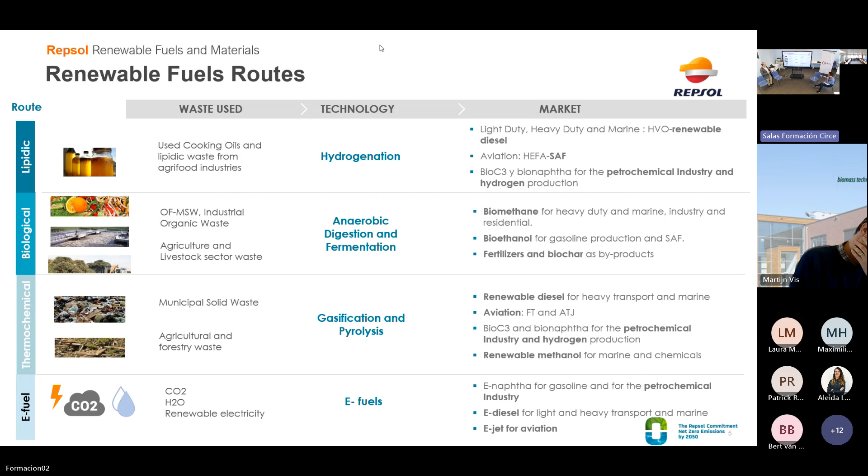For biological transformation, we have a pipeline of anaerobic digestion and also fermentation of biomass to produce biomethane and bioethanol. For thermochemical, we are looking at both gasification and pyrolysis - gasification also with municipal solid waste, and pyrolysis of biomass and plastics. And then with CO2, the e-fuels, we are already investing in that.

In terms of circular materials, depending on the quality of what we find, if the quality is very high and the product is very pure, we are doing mechanical recycling, so we are mixing our virgin polyolefins with recycled polyolefins. Then we also have chemical recycling processes, the pyrolysis. We are processing that oil and giving certificated circular products to our clients.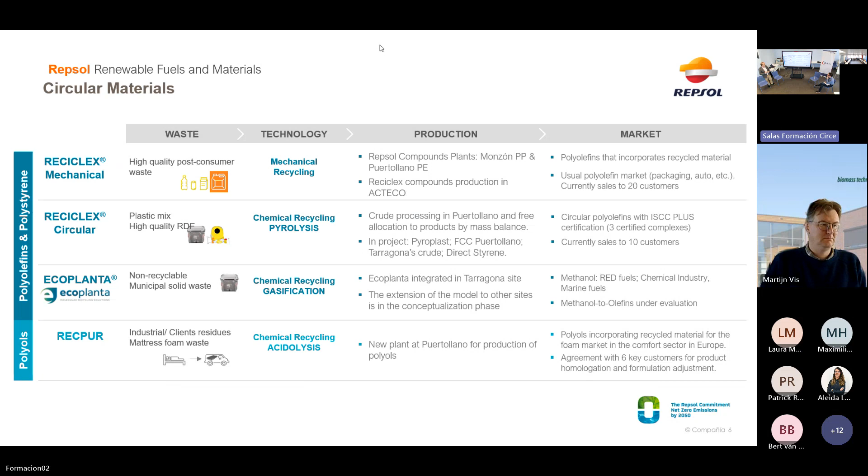Then we have gasification of municipal solid waste, and we have the Ecoplanta - I will talk about that later. And then we have the RECPUR project, where we are recovering polyols from mattresses from waste, and we have a plant in Puertollano.

One of the important things is that this is already a reality. We are doing it already. This is not something in the future, because it's more than 10 years that we have been co-processing vegetable oil. We have a capacity of about 1 million tons of co-processing. So we are doing it already.

And then we are also chemically recycling the plastic, and we are selling biojet for our clients, and also 100% renewable diesel for our clients. And then the R&D center, which is quite big and quite important for Repsol, is testing more than 40 wastes and researching every single route that exists.

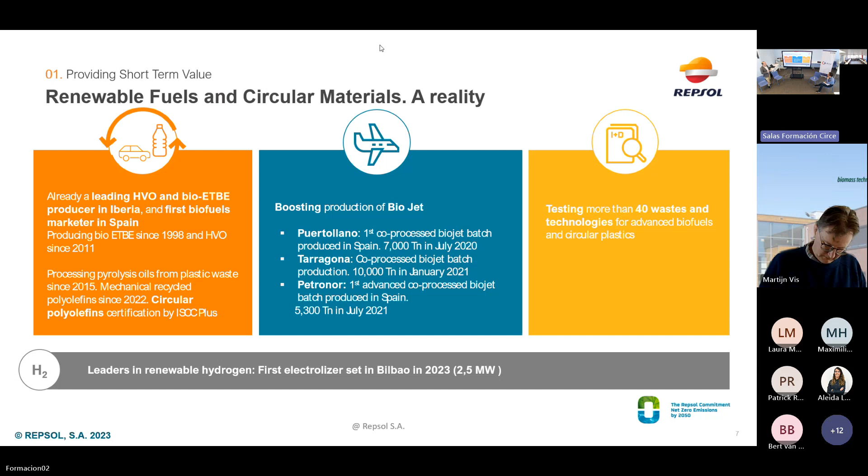We also have a first electrolyzer in Bilbao, 2.5 megawatts. The advanced biofuels plant in Cartagena is right now in the commissioning stage, so we are already producing HVO from animal fats and from used cooking oil - 250,000 tons - in Cartagena.

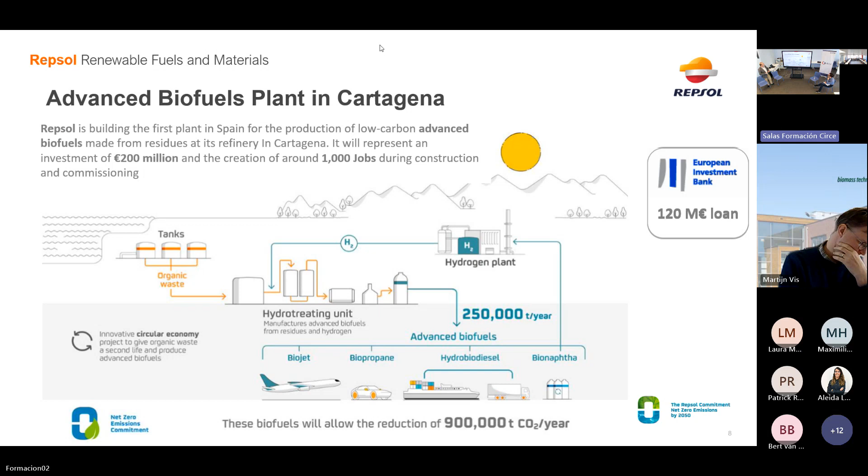200 million euros investment. Then this is important, I think, for you, because we did a big bet in gasification of municipal solid waste. We have this project with Enerkem technology, and we participate in that technology also. We produce a syngas, and we can synthesize methanol or synthetic crude oil, and then we can use our installations to produce circular materials or renewable fuels.

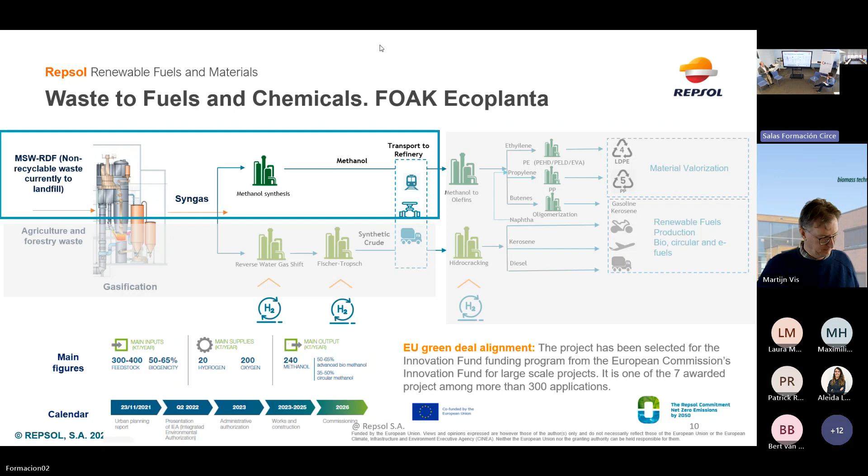Our first project in Tarragona, which is right now in the final investment decision, it's a quite big and quite expensive project, a 1 billion project. We will take 400,000 tons of municipal solid waste, the reject fraction, and produce 240,000 tons of methanol. As it is 65% biogenic, this carbon will end up being biofuel in a 65%, and the other carbon which comes from the plastic will become new plastics, so with circular products.

And we have a pipeline of these kind of projects for the places where the waste is accumulated. Our administration and also waste managers will be very happy if this has success, because to accomplish the legislation that we have, I think it is going to help a lot.

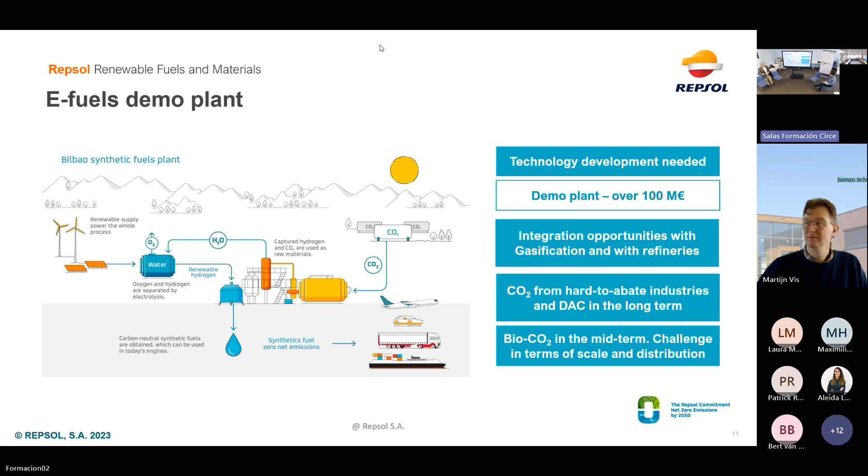Then the last thing, the e-fuels demo plant. It's a 100 million demo plant of e-fuels, also the first in Iberia. We are developing it in Bilbao. We have the electrolyzer of now 2.5 megawatts. It will increase to 10 and then to 100 megawatts electrolyzer.

And then plastic to olefins. Rebecca, when we discuss, she can explain a little bit more this project, which is a thermochemical conversion of plastic waste, and this is something that we are developing in-house.

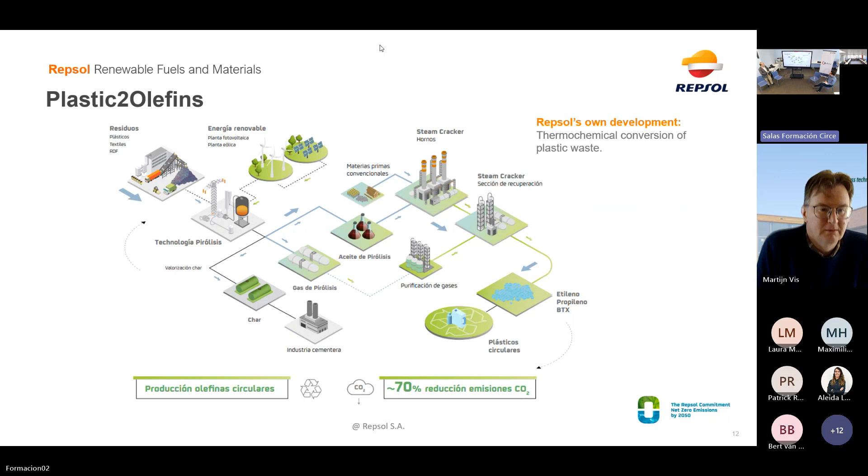The last thing that I wanted to share is that we need partnerships. The raw materials are not commodities, so we need to establish robust partnerships from the raw materials point of view, of course, also from the technology operation with technologies and licensors, and also with the final users. We have to build demo plants and first-of-a-kind plants, which is not easy because there's an implicit high risk, but someone has to pay, someone has to start, and we are ready to do it.

But we also need a little bit of help. We need public funding to help us doing that. All the big projects that I have talked about, they have been financed through this. So collaboration, private and public, I think it's very, very important to boost this business.

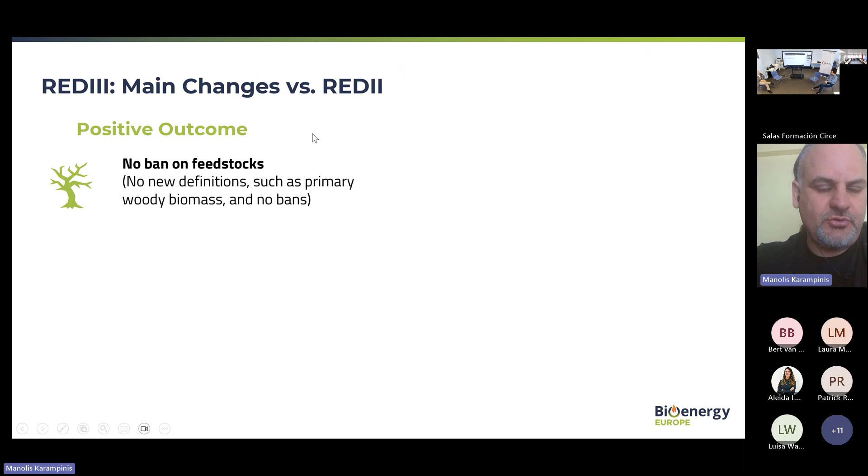But there is undoubtedly a strengthening of the sustainability criteria. So there is, for example, a mention of the famous cascading use of biomass, meaning that biomass should be prioritized first for non-energetic applications rather than going into energy. Although the way it is regulated in the text allows for several exceptions on the country level, on the market basis, to absorb biomass in competing applications.

Also, there are some restrictions in terms of feedstocks when it comes to forest biomass and power production. So no subsidies for, for example, industrial grade roundwood or stumps and roots from trees. The exception threshold is lowered, meaning that more installations will have to comply with sustainability criteria. The greenhouse gas saving criteria are also tightened for at least the power and heat facilities, and more emphasis on no-go areas and more details on what is sustainable forest management.

Strengthening for sure is one of the key words in the sustainability policy of the EU up to now.

Again, when it comes to biofuels, I found it interesting to mention a report that was published in December from the European Court of Auditors. They have several observations. I would say it's not necessarily the case that we as an association agree with all of them, but there are two which I would like to highlight, and I think that we are in agreement. The first one is that the EU biofuels policy lacks a long-term perspective.

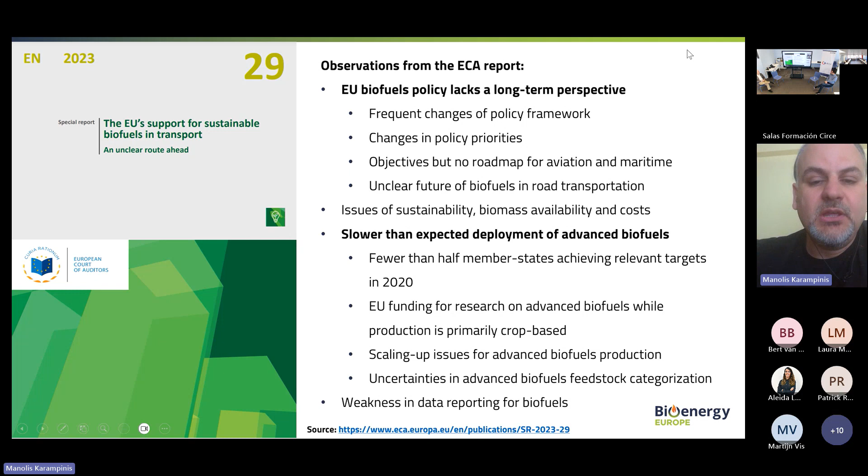To conclude my presentation, what we are seeing now as an association is that we are expecting demand for biofuels in aviation and maritime to increase significantly in the coming years. Everybody knows in the market that the feedstocks in Annex 9 Part B, the mature technologies, have limitations in their supply. There's only so much UCO or animal fats you can get in the world. So the interest in the feedstocks of Part A is going to increase, but there are several issues to be addressed: technological maturity, cost, supply chain challenges, and the frequent policy framework and priority changes, which translates into investment uncertainty.

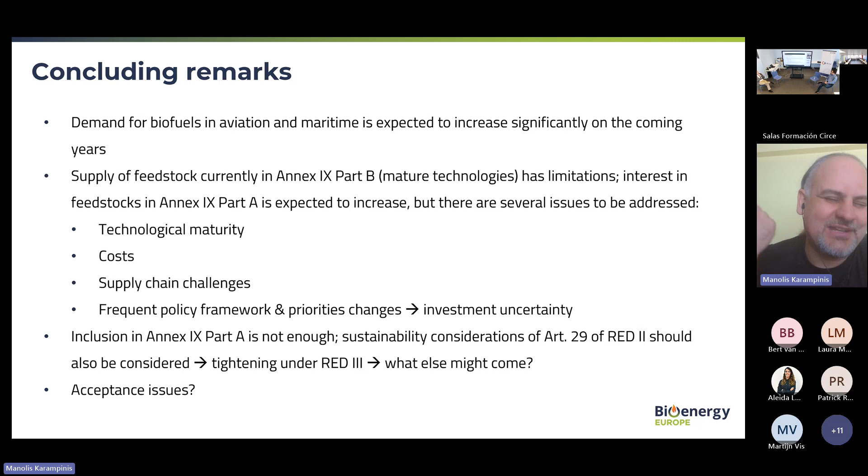Please remember that the inclusion of a feedstock in Part A of Annex 9 is not enough. You should also take into consideration the sustainability aspects of Article 29, the further tightening under RED III, and what else might come. That is also very much related to acceptance issues of biomass and bioenergy. There is a strong push from parts of civil society, not everybody, to tighten up the sustainability framework. That is why we think that our work in Brussels is so important, because we are the answer of the sector to those voices. I think that's enough from my side. Thank you.

Thanks a lot, Manolis, for this great overview. All the main points of legislation are clearly taken. I think we have a few minutes for some discussion.

Within the BioTheRoS project, we have a real focus on advanced biofuels, specifically gasification and pyrolysis. I found it very interesting in the presentation of Pedro Segovia of Repsol that you are involved in let's say all the fuel technologies imaginable. Of course you are in conventional fuels, you're working on advanced biofuels, you have work on e-fuels, and you use recycled carbon fuels with waste. Could you give some insight on how you position advanced biofuels as we develop in the BioTheRoS project? Do you see a great future for them, or do you think recycled carbon fuels are actually maybe as attractive? On the other hand, we heard there's a huge biomass potential in Spain. I would be interested to hear your vision on this.